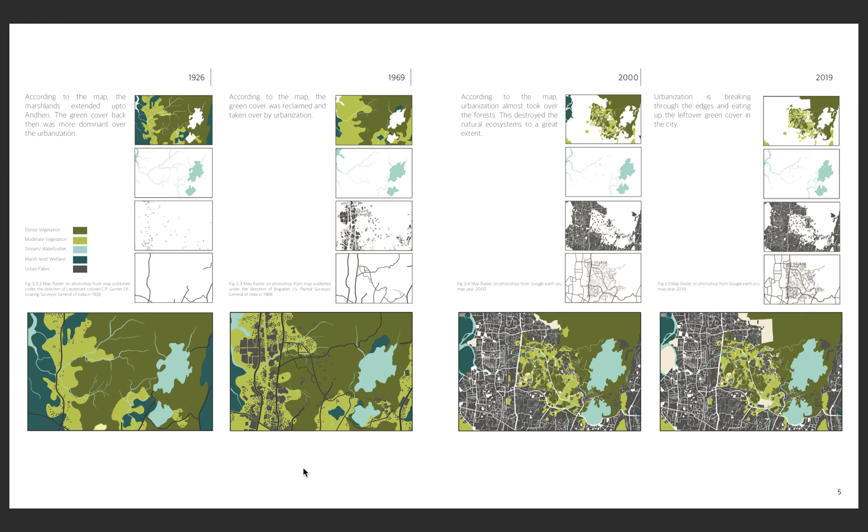These show some transformations of the land from 1926 to 2019. In all this development, there is negligible consideration shown toward the ecological aspect of the land and the diverse socio-cultural relationship between the people and the land. Over time, all the edges of the forest have been eaten up by the city.

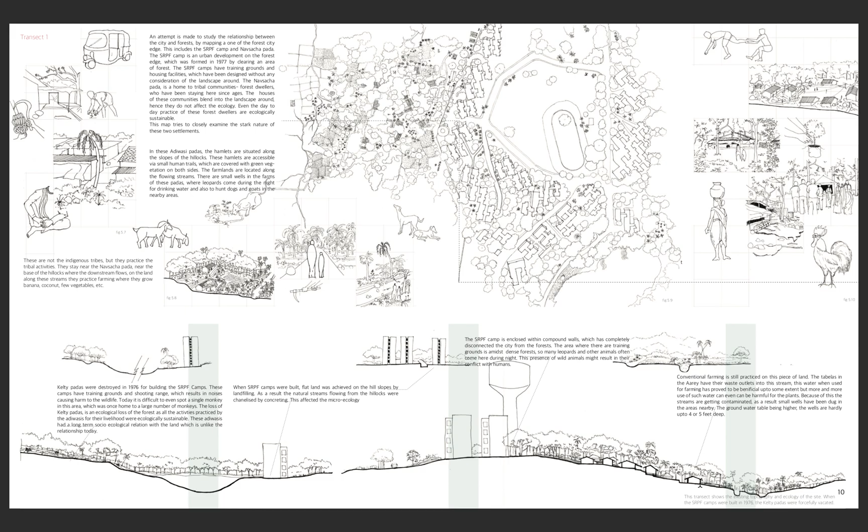So this is the transect edge; an attempt is made to study the changes that occur when crossing the forest boundary, and the change in the socio-cultural fabric of the landscape.

This includes the Oberoi Splendor on one side and the Tabela on the other. There are a few informal settlements in this area. Near the Tabela are the grazing lands of cattle, which are also a source of fodder for the Tabela. Adjacent to this building complex are the farmlands for the forest dwellers.

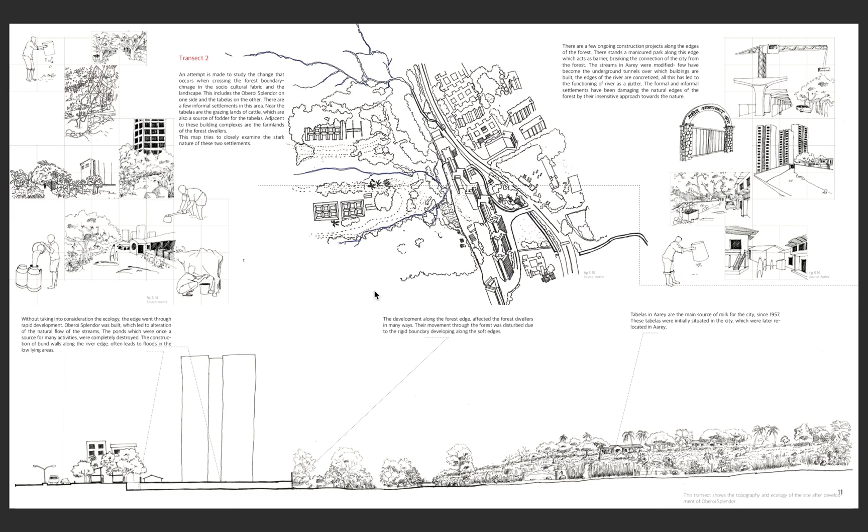So this map examines the stark difference between two settlements. These are the tabelas, where a natural stream flows through, and when it comes here, it gets totally concretized. So this is transect 3.

An attempt is made to study the relationship between the city and forest by mapping one of the forest city edges. This includes the area where the metro car shed is being built and the surrounding Adivasi Pada and river. The metro car shed is around 80 acres.

The river flowing down the hillocks and meeting the Mithi River passes through this land. During the monsoon, when the Mithi River gets flooded, the land acts as a floodplain of the river. The map tries to closely examine the impact created by the metro on the ecology and social life.

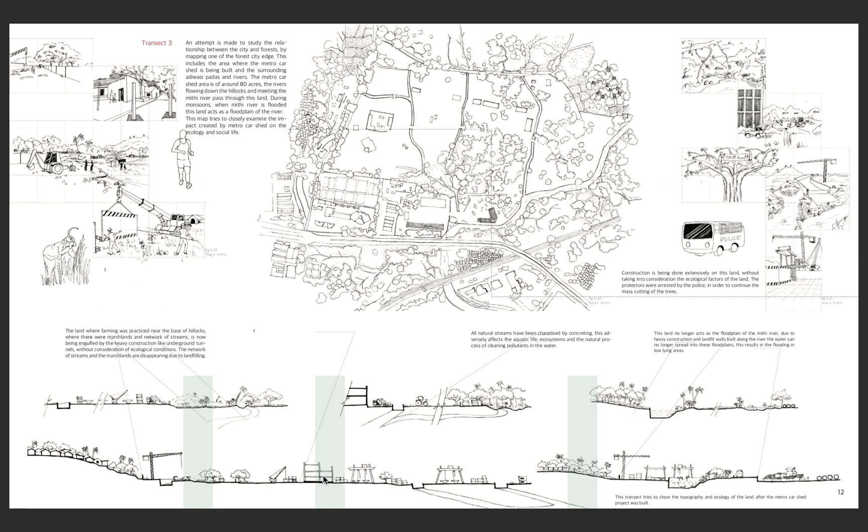So these are the Adivasi Padas, and this is the construction site which was used for paddy fields. Now it's gotten concretized totally. These are the streams. So the forest community uses certain plants for their medicinal use and daily food. Most of the plants are wild in nature, grown in the forest.

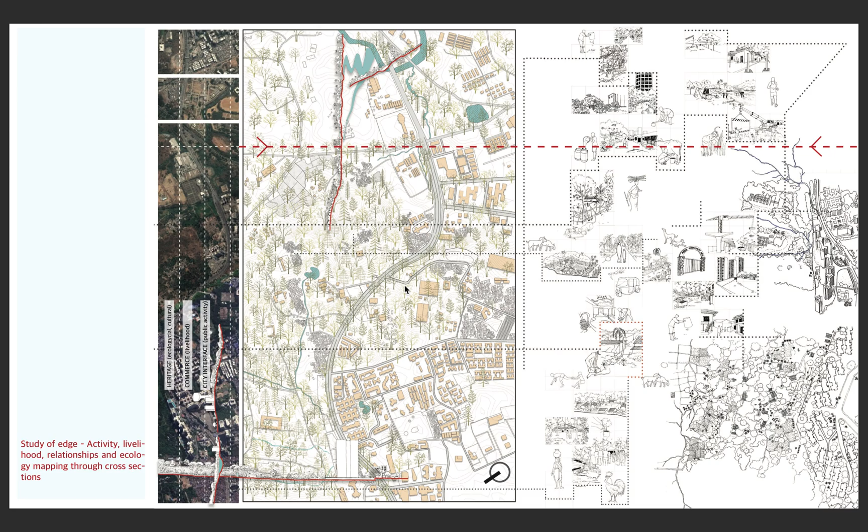So these are the study of edge: activity, livelihood, relationship, and ecological mapping through cross section. You can see the mapping through cross section. And these are a series of maps which study the edge of this road.

Study of edge existing housing typology. You can see the tribal padas, formal housing, and informal housing. Then study of social infrastructure.

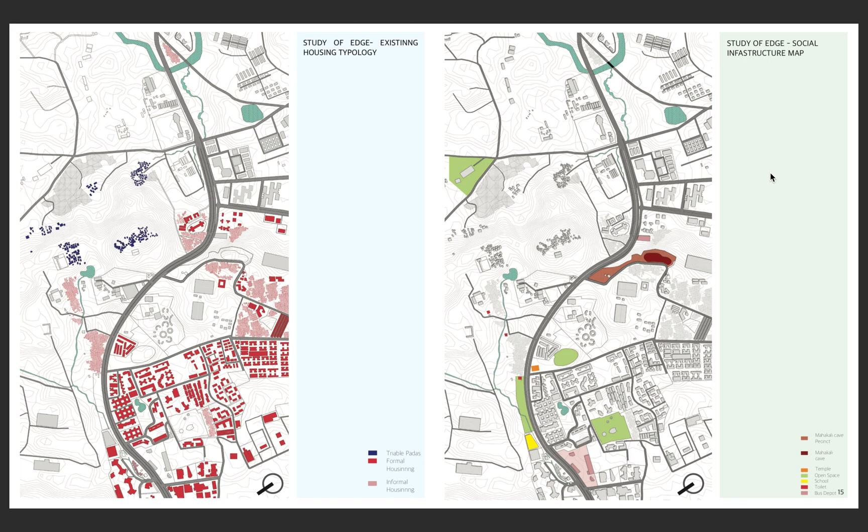So Mahakali caves, some open spaces, school, toilet, and bus depot. Some are public toilets. So study of edge and land use map.

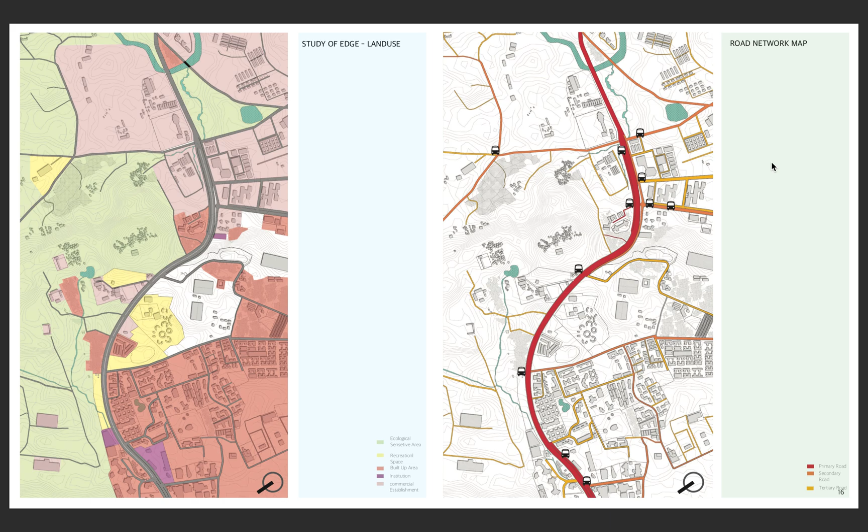These are the ecologically sensitive areas, recreational spaces, built-up areas, institutions, and commercial establishments. These are the road networks where you can see primary, secondary, and tertiary roads. So commercial establishments, you can see SEEPZ, electrical management center. These are the SEEPZ, then film studios, etc.

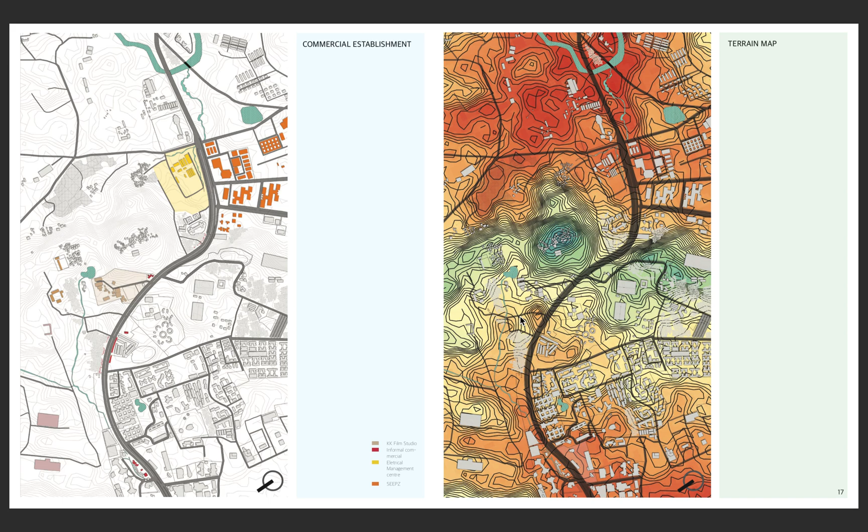So these are the urban walls between the forest and city. The red one shows the urban development that will act as a wall between the city and the forest.

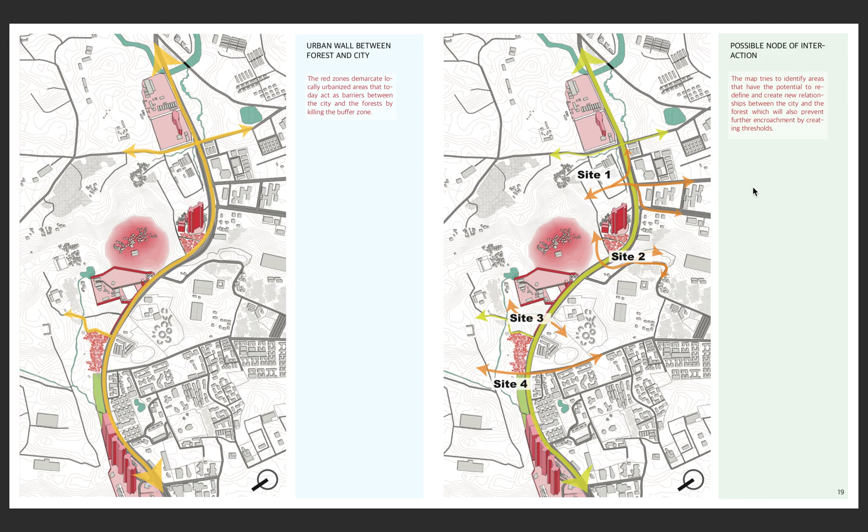So, possible nodes of interaction. The map tries to identify areas that have the potential to redefine a new relationship between the city and the forest, which will also prevent further encroachment by creating thresholds. So these are the four sites.

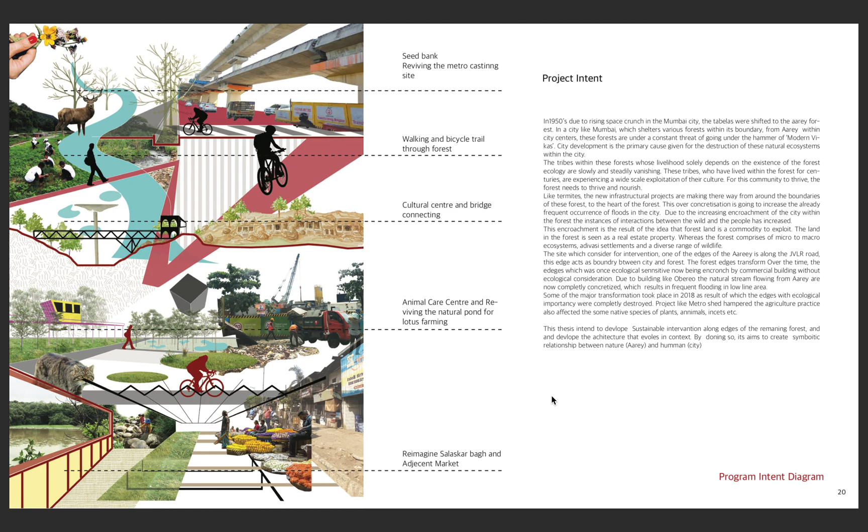Project intent: this thesis intends to develop sustainable intervention along the edge of the remaining forest and develop architecture that evolves in context. By doing so, it's aimed to create a symbiotic relationship between nature and humans.

Master plan: the master plan allows one to cycle around and experience the life of the forest and get glimpses of Adivasi padas, ponds, indigenous species of animals, cattle, sheds, etc., through different textures of material and atmosphere generated by the track - porous stone, rubble, elevated steel ramp, etc. - with different points in mind based on the condition of the space. These are the master plan.

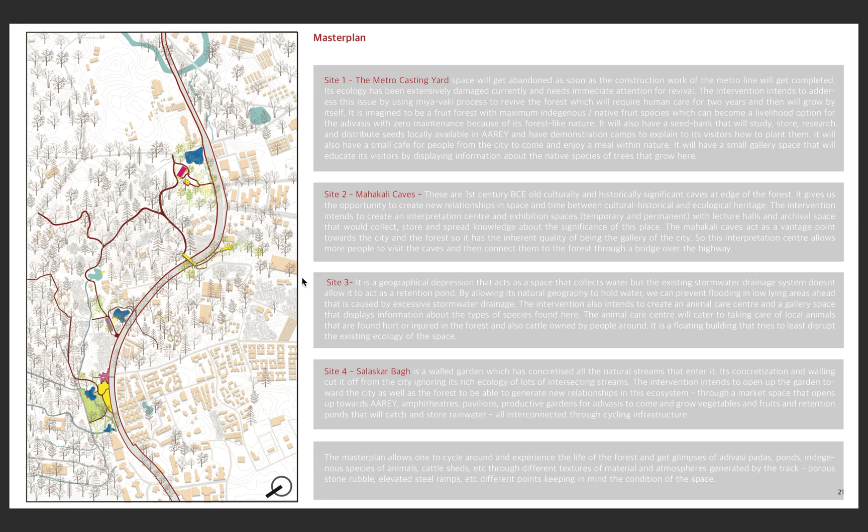So the first site is the seed bank. The metro casting yard space will get abandoned as soon as the construction of the metro line is completed. Its ecology has been extensively damaged currently and needs immediate attention for revival.

The intervention intends to address the issue by using the Miyawaki process to revive the forest, which will require human care for 2 years and will then grow by itself. It is imagined to be a fruit forest with maximum indigenous and native species, which will become a livelihood option for the Adivasis with zero maintenance.

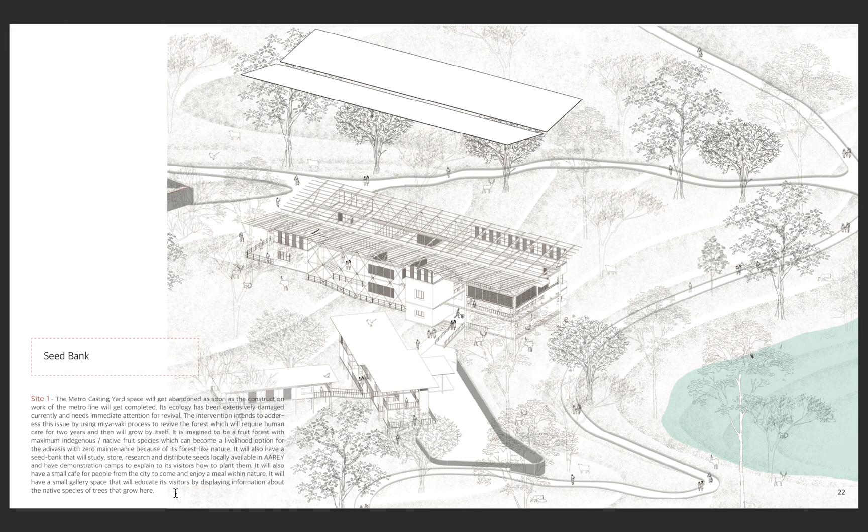Because of its forest-like nature, it will also have a seed bank that will study, store, research, and distribute seeds locally available in Aarey, and have a demonstration camp to explain to visitors how to plant them. It will also have a small cafe for people to come and enjoy a meal within nature, and a small gallery space that will educate visitors by displaying information about the native species of trees grown here. So these are the landscape strategies.

So this is the wall constructed by the casting yard, a concrete wall. Remove this existing concrete wall, construct a stone gabion wall to avoid landslide, then plant some native species.

So this is the oxalis, locally called amboshi. This species avoids soil erosion. These are some species which stabilize the initial reforesting stage.

Then these are some bigger plants. After some time, nature will let this wall collapse and nature will take over the landscape.

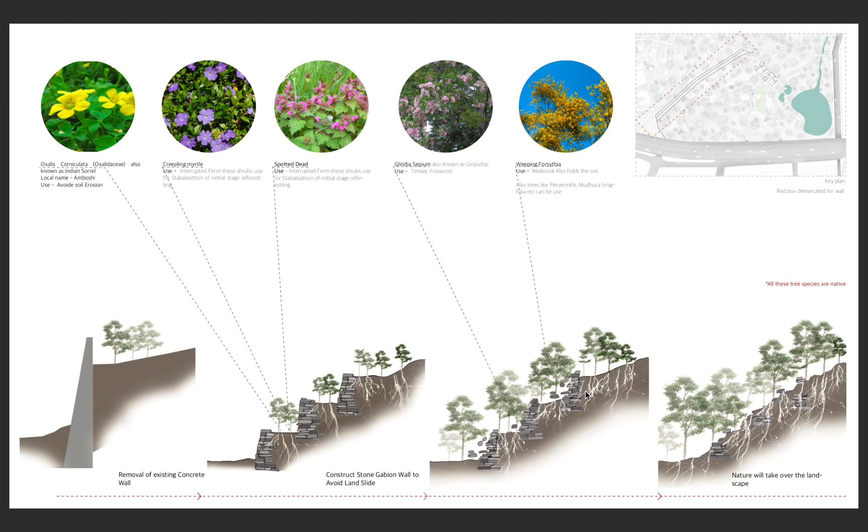So the first floor plan: the entry for the seed bank is from here, and this is the waiting area, then the reception, then seed storage. This is the open area.

Then this is the moisture test and purity test. This is a special test lab. This is the germination chamber. This is the exhibition space. This is the staff room, and this is the testing field, outdoor testing field. This is the sitting area.

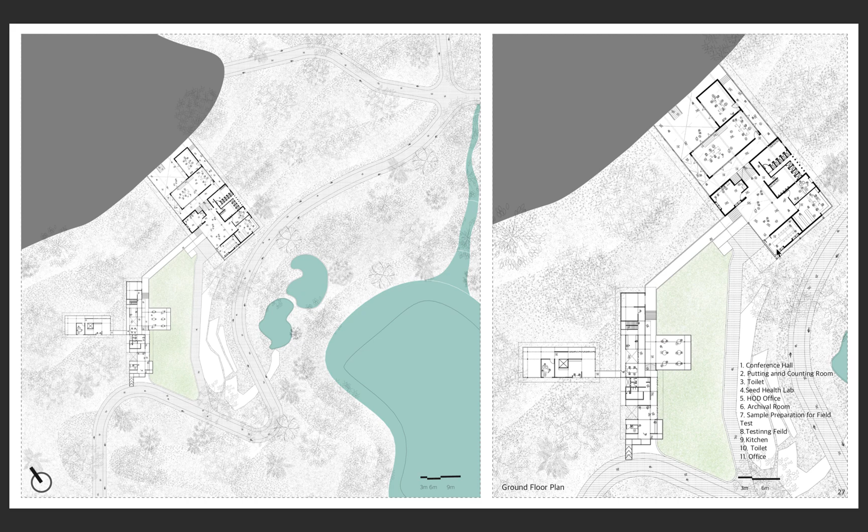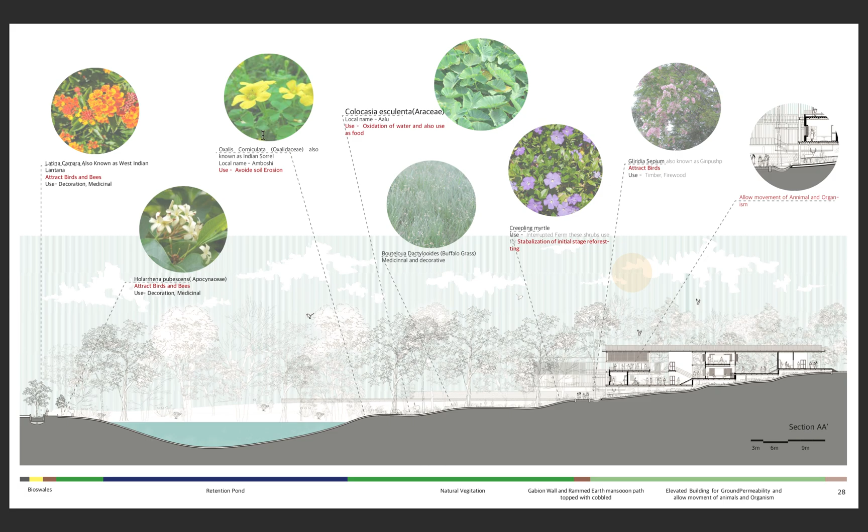So these are the sections you can see. Elevated building for ground permeability, allowing the movement of animals and organisms. These are some specific spaces at specific points. These are the zoomed-in views.

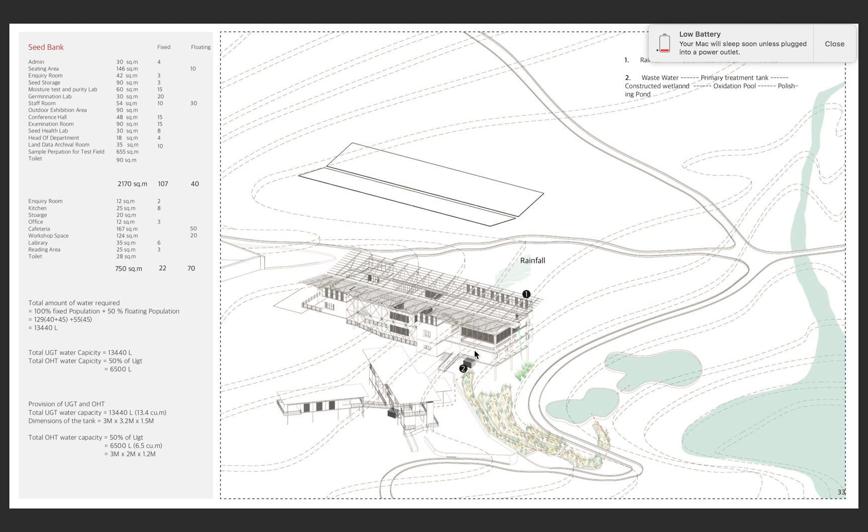These are the cross sections, you can pause and see the details. These are the services, you can see the calculations.

So this is the cultural center. There is a century-old relationship between the city and the forest.

The intervention intends to create an interpretation center and exhibition space, with archival space that would collect, store, and spread knowledge about the significance of this place. The Mahakali caves act as the vantage point.

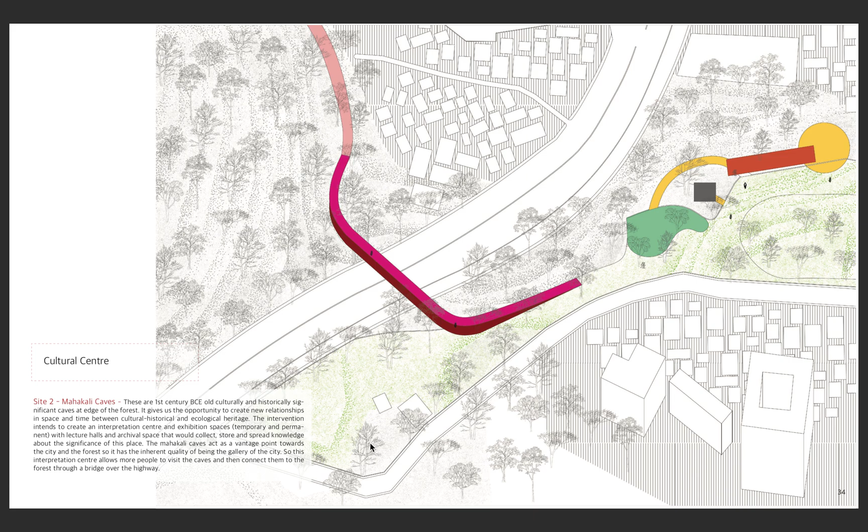It acts as a vantage point toward the city and the forest, so it has an inherent quality of being a gallery of the city. The interpretation center allows people who visit to connect with the forest through a bridge over the highway. So this is the third site.

It is a geographical depression that acts as a space that collects water, but the existing storm drainage system does not allow it to act as a retention pond by allowing its natural geography to hold the water. We can prevent flooding in the low-lying area ahead, which is caused by excessive stormwater drainage.

The intervention is also intended to create an animal care center and a gallery space that displays information about the types of species found here. The animal care center caters to local animals and those found hurt or injured in the forest. Also cattle owned by people around the floating building, trying for least disruption to the existing ecological space.

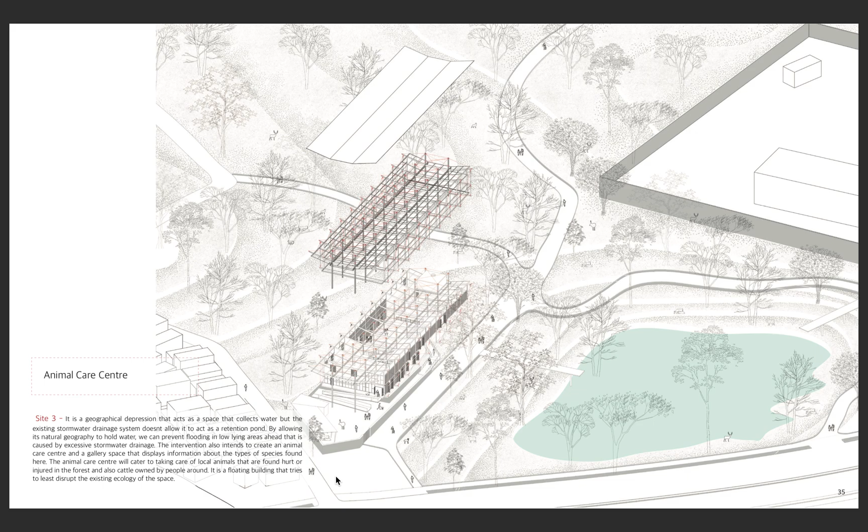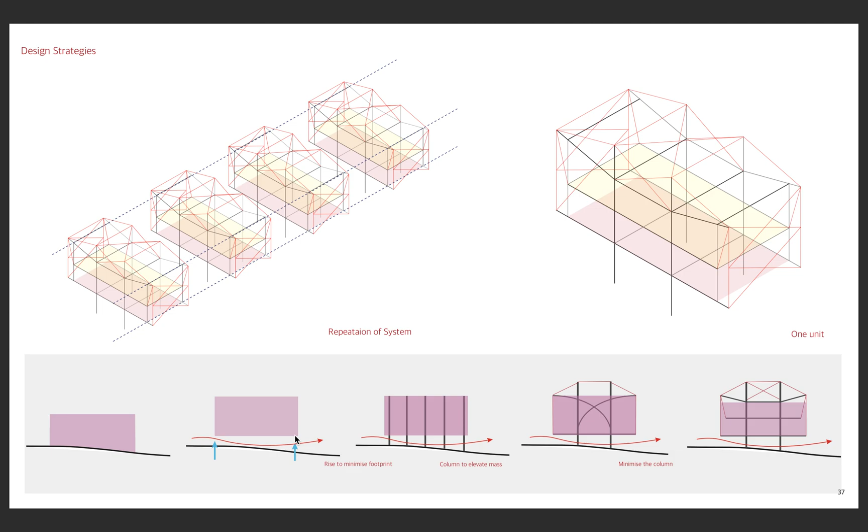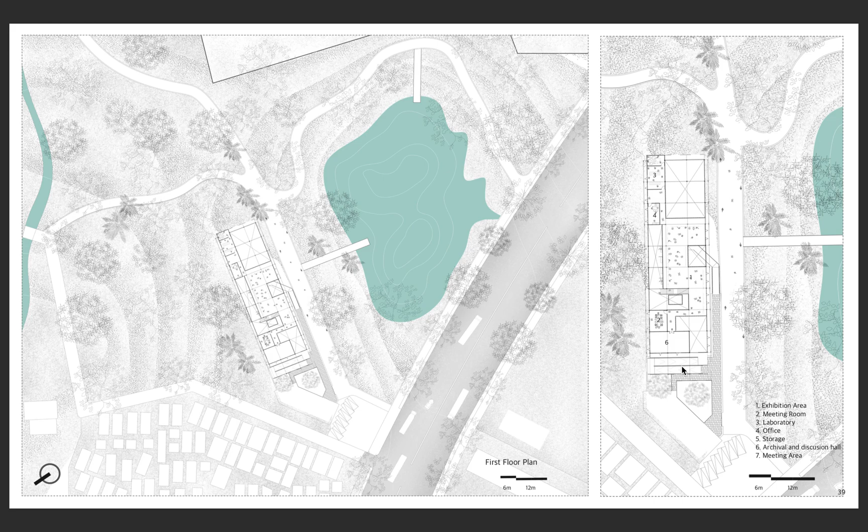So this is the first floor. The maximum part is gallery, then archival and discussion hall, then the laboratory, etc.

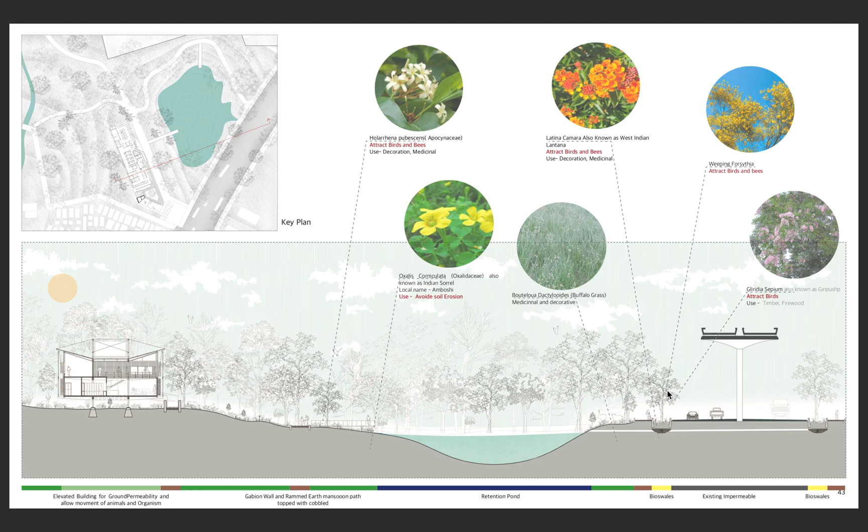So this is the cross section where the landscape strategy is shown at specific locations. This is the zoomed-in view, and this is the detail, you can pause and see the details.

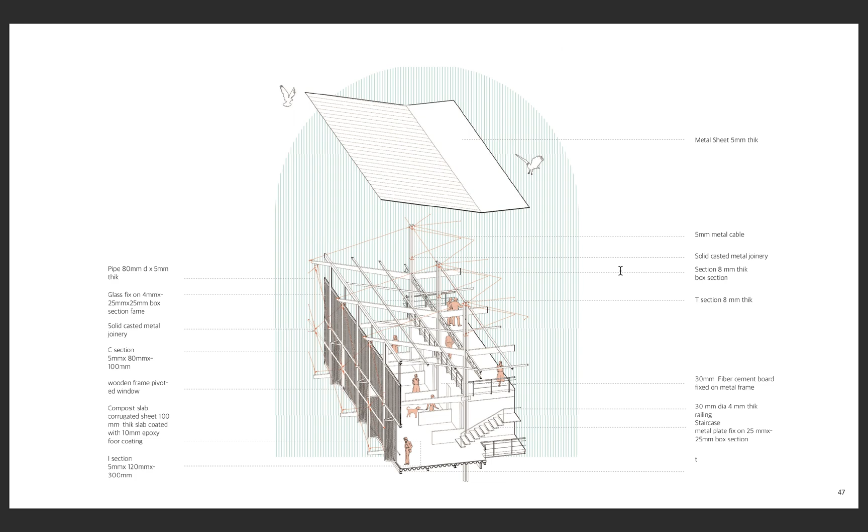You can see here, so this is the last site, Salaskar Bagh, which is productive gardens. Salaskar Bagh is the walled garden which has concretized all the natural streams that enter it. This concretization and walling cuts it off from the city, ignoring its rich ecology of interacting streams.